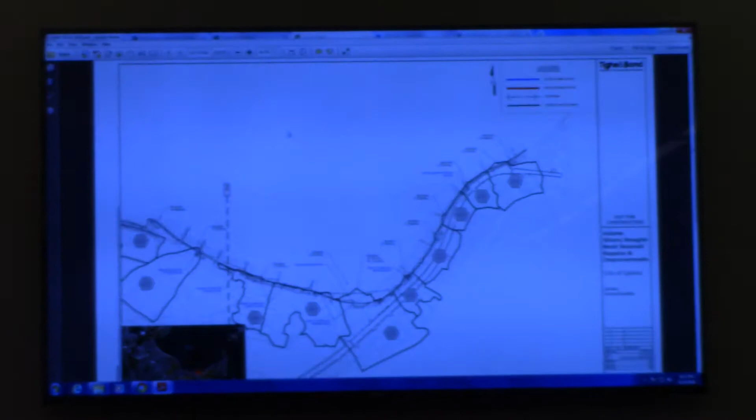So this is a map right here, called the sub-watershed map. Each of those drainage areas, based on topography and runoff and so forth, flow into the tide gates and outfall pipes. That's why we're meeting with smaller groups, because there are very specific needs and issues associated with each small group.

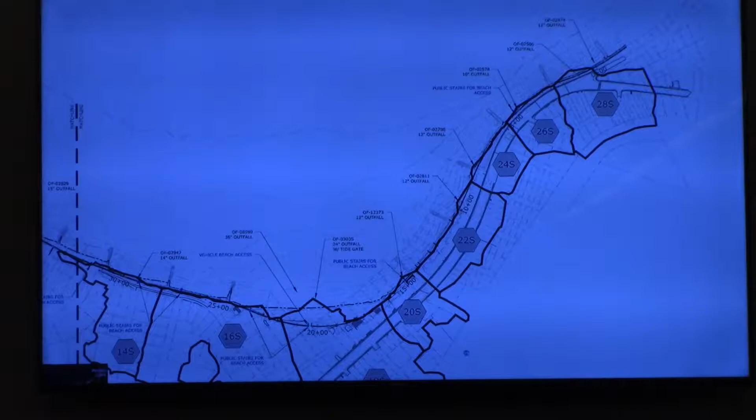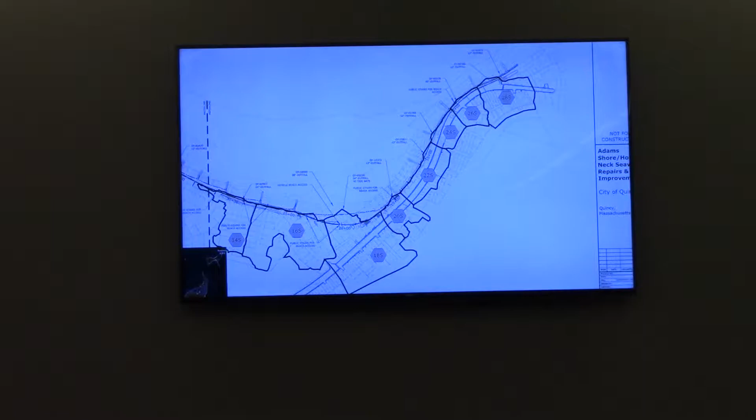That's why we've asked you all here tonight, and Dave has broken up this section of the seawall based on the different sub-watersheds. So this neighborhood, you guys all collectively know those outfall pipes and tide gates, probably 3 or 4 of them, I think there's 14 along that whole stretch. So we're meeting with small groups to talk about 4 or 5 outfall pipes, and Tighe & Bond will get into very specific information. They've done a lot of calculations.

So the goal, and Dave, Ken, correct me if I'm wrong, is to increase all the outfall pipes to handle a 100-year storm instead of a 10-year storm. They can increase the size of the pipes or increase the slopes of the pipes. That all gives the pipes a lot more capacity.

The outfall pipes, the ends have all been found. We clean them out on a regular basis. Sometimes the tide will come in and push sand back in there. So these guys are fully aware of all the existing conditions and how best to fix it.

So if we're going to upgrade those pipes to a 100-year storm event, we may as well do it before they build a wall on top of it. If you have a pipe that might be 12 inches in diameter, these guys want to make it 2-foot diameter, we have to do it before the wall goes in. So a lot of the drainage concerns you had at the last meeting have been addressed.

The second thing I took away from the meeting was access along the wall and through the wall. Dave and Ken have developed very detailed plans on the different access points and added some public access through the wall, and they revised the detail.

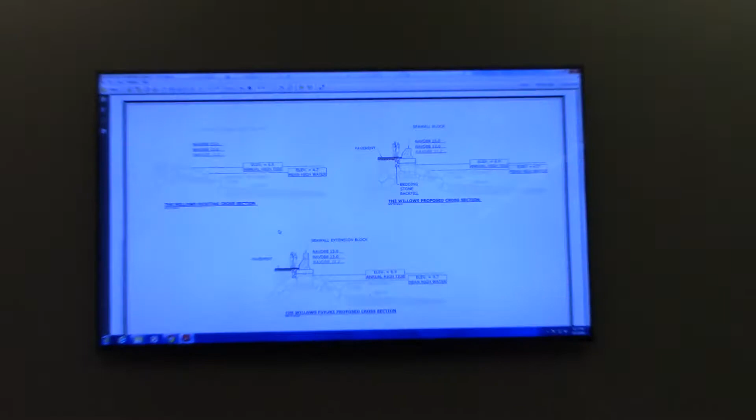So we looked at several different cross sections for the details, and these guys will get into the specifics. But that red that you see right there, it's largely going to be the shape of the seawall that's there now. We're just going to bring it up a couple feet, but it'll be that same mass.

So the access along the wall that we spoke about at the last meeting wasn't as high a priority as this detail. Again, from the last public meeting, we heard a lot about drainage and flooding, and a lot about access. We've tried to correct it in the revised design. So with that, I'll turn it right over to Dave.

Thank you. Just one thing, and I know Dave you're gonna cover this, but Paul put up that diagram too.

Today, as I said, we started early, 9:30 or so, 10 o'clock, and went pretty much the stretch all the way up to Mike Carter's house. But conversation was back and forth that the design going up 2 feet, and Dave Murphy will touch on it a little bit. We can also talk about making the design so that an additional 2 feet can be added if we have to go there.

So that's going to be a little back and forth conversation, because I know folks in some areas are saying, hey, we want to go higher. We realize that we're on Sea Street and the houses between the Willows and Shoreside, you go up 4 feet, it's awful high.

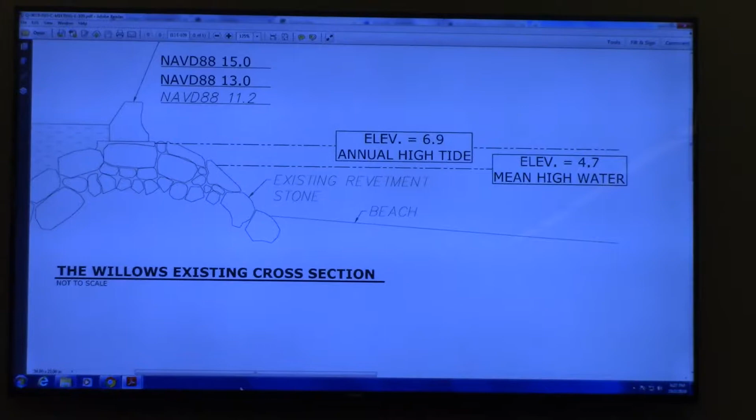Ken, if you can zoom in on the top left—this is the existing cross-section. We call it a curved face block. There are 2 of those in the city: one has kind of a gentle curve, another one over on, I think it's Squantum Street, that has a more defined curve to it. But there are 2 separate blocks that exist in the city. That's one of them. We'll decide on that in a few minutes, and I'll explain that. That's where you are today.

So just for clarity, elevation at the top of the wall is average 11.2. That's NAVD datum. Be careful not to get confused, because there's a 5.2 or 5.4, 5.5 foot difference in some of the datums, so always be careful which datum you're working off of. Tonight we're only going to use NAVD 88. So the top of the existing wall is 11.2. Mind you, the annual high tide is 6.9, and your mean high water is 4.7. So just understand that height difference between the top of the wall and your mean high tide here.

What we have talked about at the last meeting was going up to elevation 15, about a 4-foot increase.

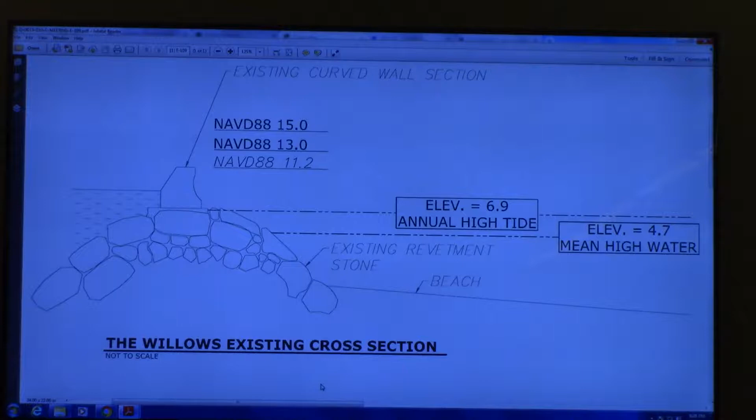After all the feedback back and forth, the city's come to the decision that right now we're going to move to a 2-foot increase with the ability to go to 4 foot. So right now the plan is to move to a 2-foot increase. And Ken, that's the 2-foot increase right now, taking the top of that block up to NAVD 13.

In the discussions we've had internally with the city, it's a compromise. It's the ability to—if we did a 4-foot increase up to elevation 15 today, that effectively is a 75-year design, maybe a 100-year design life, the life of the structure. But by going to 13, it's a decent design today. It covers today's wave action.

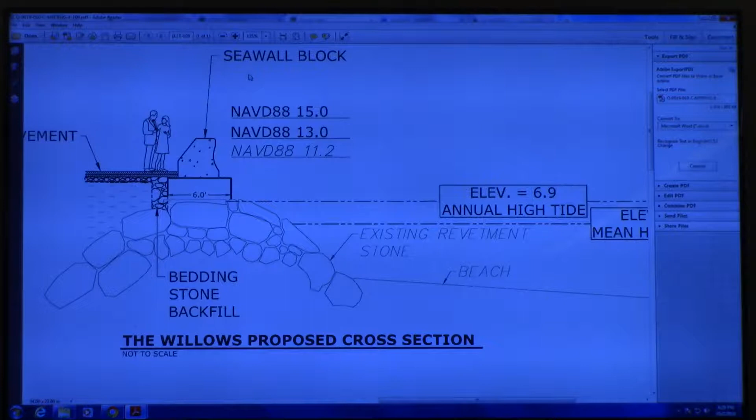But we know, as we've discussed, that sea level rise is upon us, and that we're going to see some of that. So having the third option—where we're headed, Ken, if you flip to that one—this gives us the ability to take a 2-foot block, and the way we're going to design the lower block, we're gonna design it so that we can put either an 18-inch, or 24-inch extension on the top of it, similar to what was done on Edgewater Drive back 15, 20 years ago. So that's kind of where we're headed right now, that block design with the ability to put the seawall extension block on top of it.

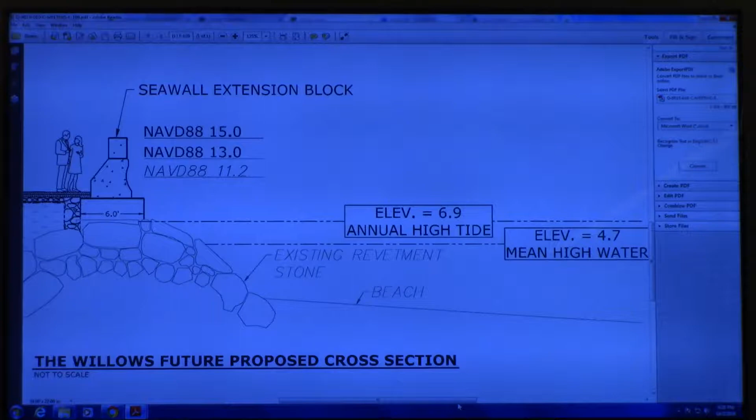That is a balance between the blocking of views and trying to address the long-term rise in sea level and ability. So we believe that the 2-foot rise will eliminate the majority of the wave overtopping for a storm like we saw in March. There'll still be water that'll get over, but it'll be more the splash as opposed to a heavy volume of water that'll come over.

This is a reminder, the storm we had in March got up to elevation 9.5. So Tighe & Bond is proposing coming up to 13, which is still 3.5 feet above that high tide we saw in March. So we're dealing with wave action at that point. If the wall was at elevation 13 this past March, a lot of the flooding would have been taken care of.

And I think too, as we strolled around today on the wall, and we realized this a couple of weeks ago when we all had a meeting up at City Hall, how close the houses are to that seawall on Sea Street, till you get to Post Island, you get a little loop there. But also, as we walked along, we talked about the other side, the marsh side where PJ is, to say even though we're gonna come up and protect this a little bit better on the seawall end with the proper drainage—and Dave will talk about that also in the seawall—we also discussed the other side, because that side, if it gets over, as a lot of people know, it's a very low point at the boardwalk, and to get it out of there we have to have good drainage too. So it wasn't just—I just want to reiterate to anybody, I know I'll probably hear it, what about the other side, what about the other side?

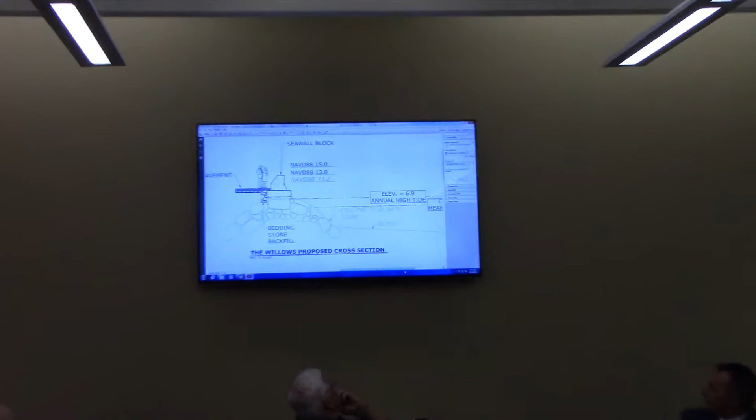So we'll be pouring about a 2 foot high pad. Right now you have a 4-inch leveling pad. That'll all come out. We'll go up to 2.5 feet, and then put the block on top of it. There will be about 18 inches to 2 feet wide on the top, but 2 feet higher. So you can walk on it, but it gets more dangerous because the fall is greater.

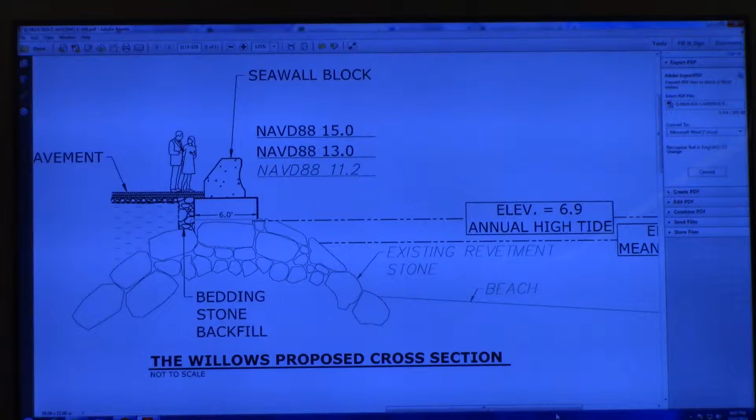You had a question? I did have a question. What number house again? 789. I noticed on the NAVD 88, you go from 11 to 15, and in the middle...

Was there any consideration for somewhere in the middle of that, splitting it not 2 and 2, but splitting it 2.5 and 1.5? We had a thousand discussions about that.

So you're settled on the 13? That was kind of the majority. The 13 was, we don't want to go below 13 because we need to address wave action today and some anticipation of increase in the near future. In speaking, in addressing this gentleman's comment, maybe it's 13, maybe 14, and then something added on top of that later.

And the second part of the question, I'm not looking for an immediate response by the way, is there any guarantee that the money will be available to put that 2-foot block on top?

I mean, that's all nice to talk about, but... Well, do you want to speak to the availability of money right now? We're talking about the 2 foot on the other side, he's talking about the future. Yeah, the future. I mean, I don't think that's a guarantee. I think they'll, you know... Oh, you mean the 2 feet to make it 15?

You bet. I mean, I can see in 15 years, you start talking about it, and the populace of the city saying, come on, how many times are we going to do this wall? Dave, percentage-wise, what would adding that cost? It's certainly not going to be the same as going up now, because the majority of the money is in the leveling pad and resetting the revetments, the pipes. So you don't have to answer it now, I'm just throwing it out there. It's not a high percentage of the cost we have now to add 2 feet.

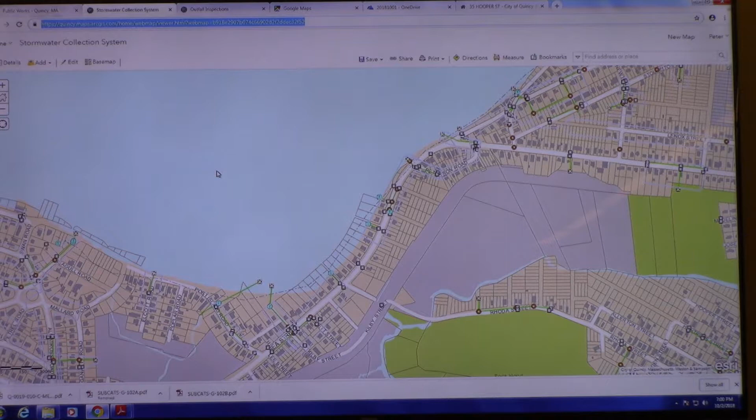There's roughly 14 outfalls along this stretch, along the project area. In this area, you'll note there's 1, 2, 3, 4, 5, 6, maybe 7 outfalls that collect drainage from a number of structures across the road as well. Councilman McCarthy was mentioning there's some drainage back here, but you'll notice there's a lot of catch basins—those little black squares—that drain and collect water toward those outfalls.

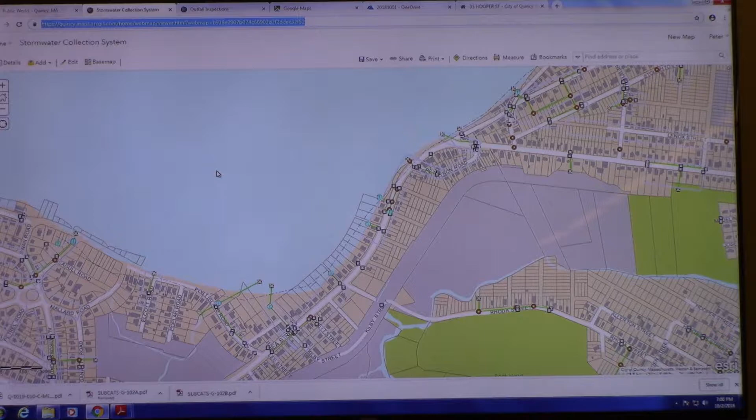What we're looking at, what Paul was alluding to, was using part of the city's GIS system that allows us to look at the drainage areas for each of these outfalls. So we've broken this down and said, okay, this outfall pipe here is collecting an area of so many acres, and today that pipe is 12 inches in diameter. Well, that 12-inch pipe, pitched a certain way, can allow a certain amount of water to flow through. So we're looking at what the capacity of that pipe is.

After looking at all the pipes in the system, we wanted to recommend increasing those pipes to a minimum of 16 inches. We found some catch basins discharging using just a 6-inch pipe. Going to a minimum 16-inch pipe increases the capacity to move stormwater from one side of the wall to the other significantly.

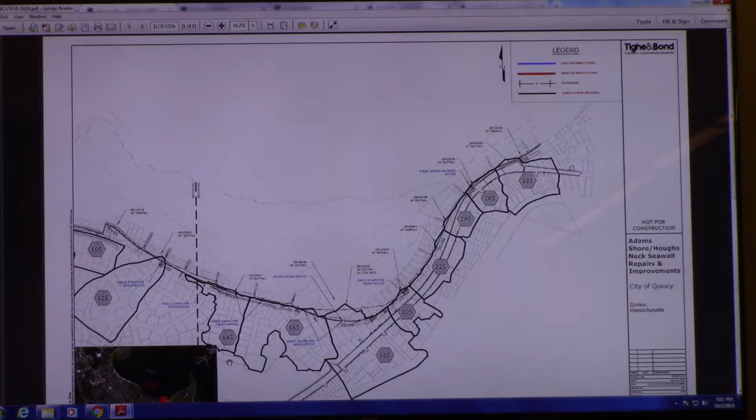That alone is not going to solve every problem, because it's a comprehensive plan that we're working with the city to implement. It's making sure the catch basins are cleaned out, making sure outfall pipes aren't buried with sediment, making sure they're located and cataloged in the GIS system like this. So the city's got plans in place to do this work, and you can see from the data they've collected through GIS that they have methods to implement the changes we're recommending.

So with that said, we're looking at increasing capacities through the system fairly significantly. In some instances, going from a 6-inch pipe to a 16-inch pipe is going to make drainage better, but it's one small piece of the puzzle.

The larger piece is looking at the areas behind as a whole, doing further investigation to figure out, on Post Island Road, on Shoreside Drive, where there are low spots, where we can locate either a temporary pump during severe storms, or a pump station—literally a building that fits in with the neighborhood—and in critical times of storm surge, that pump can be turned on and start forcing water outside the outfalls. You do that, and you're now forcing water, regardless of where the tide is, and that water will start flowing the opposite direction.

Catch basins—locating the proper number of catch basins—the standard we typically deal with is generally a catch basin every quarter acre or so. In some of these areas, we probably see that there needs to be a few more catch basins put in. By putting those catch basins in, it channels water to those outfall pipes, thus removing stormwater from the other side of the wall.

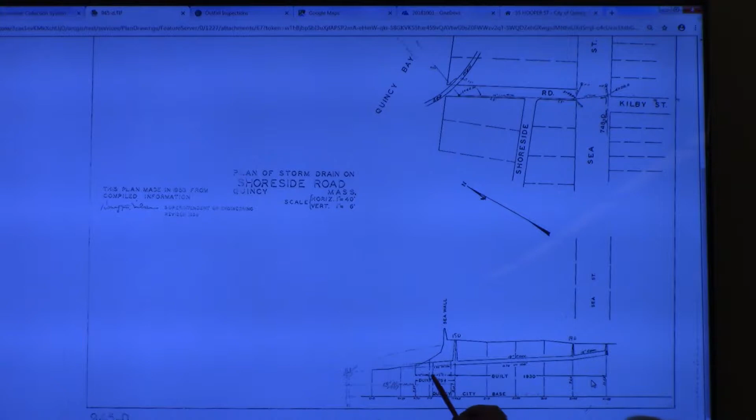Hey Ken, is this accessible for the public? These plans are over at the engineering department. This pipe here was built in 1930. Here's the seawall, here's a catch basin or manhole, same here. The pipe comes out at a certain slope and diameter, which dictates the amount of flow that can leave. So at low tide, the water will just flow out to the ocean.

The tide starts to come in. Then the pressure at this catch basin—the water acts like a straw, it will tend to do that. But if during the storm it comes up here, the water switches from here to there. Oh, it won't go anywhere. Bob, can you explain?

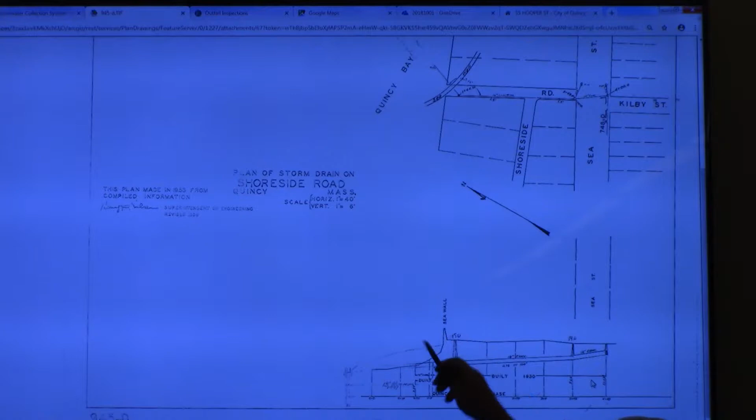So there's the hydraulics behind it all. This report here explains each one of these outfall pipes.

Just for clarity, if you have a high tide, the normal high tide is at 6 or 7. The drainage structures are up around 9, 10, 11. If there's 2 feet of head difference, if the water up gradient is above the tide, it will still flow even though the pipe is fully in water. The head pressure difference will allow that water to keep flowing, it just gets reduced some. So we're working on trying to figure out what the reduction in that flow is under different tide cycle conditions. So that's the problem.

Sorry, just for clarity, you had your hand up for a while. I was curious, are the drainage structures flowing into the marsh at all? Do any of them outfall into the marsh itself, or do they all flow towards the ocean? What about the marsh behind Post Island here? You do have a couple. Has there been any discussion about rerouting them from flooding the marsh, from basically surcharging the marsh, and directing those pipes into the bay itself so that the other water that's needing to find a place can rest in that marsh?

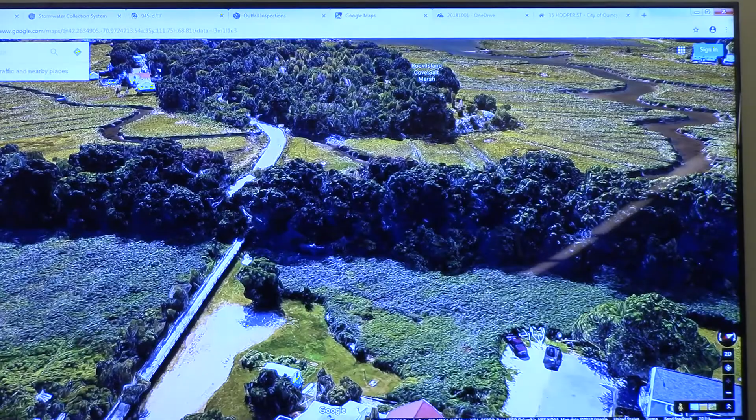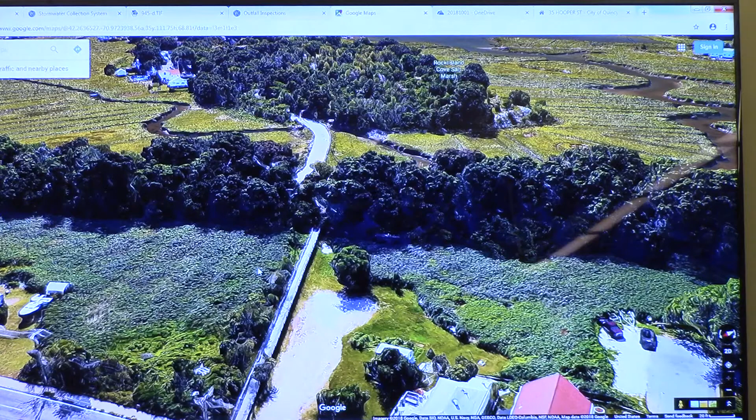And I think this go-around with the Army Corps and the folks I just mentioned, we have to come up with a solution. We can't just spin our wheels and have everyone go away, so it's a priority.

As we go through with the wall, there will be disruption along everybody's property. We'll try to minimize that disruption, but there will be sections with patios, some absolutely drop dead gorgeous. Right now the plan, as discussed by the city, is to replace in kind, so the contractor will be required to restore whatever is disrupted back to what's there today.

We got a Reader's Digest look as we walked along, and on some we're saying, okay, this has got to go back further. There were places where it's fine, so we'll go through it house by house so people will know.

Can you put up the GIS with the property lines on? There are several places where, as we raise the wall, the city has agreed to and wants to increase the number of public access stairs. So where there is an easement and access way but no public stairs, we will be adding a public stair there.

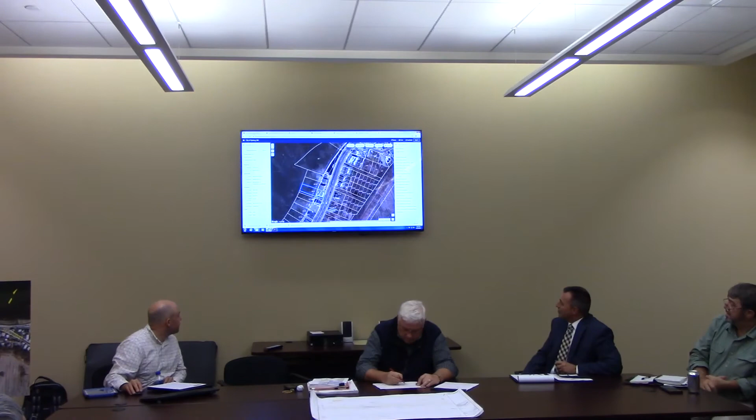There is a public stair, shown on that board on that side. Existing public access points are in green. In blue, we have proposed public stairs, so there are 2 additional public stairs that would be added as part of this.

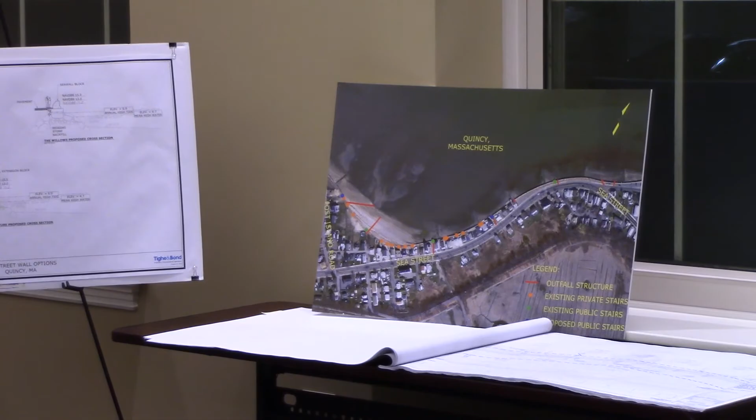And then I believe the other one is right here. So we've got one there, and then there would be another one on this side right here.

I think that's a much better approach right now. I know there'll be other questions, and we'll probably have other meetings.

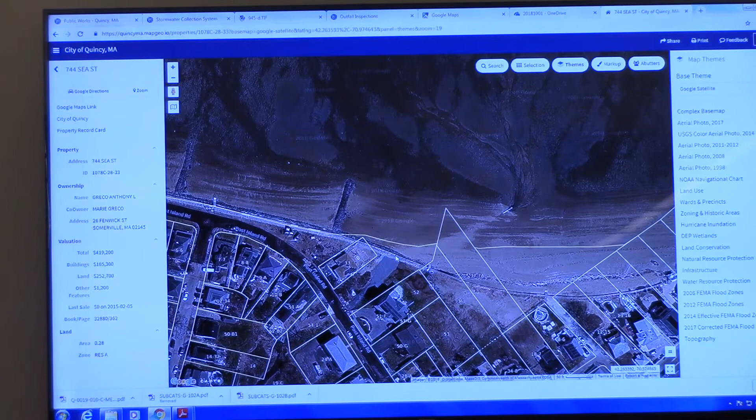Like I said, October 9th is Post Island, and we're actually going to let Tom Kelly come again for South Road. They didn't ask too many tough questions, but that's all the way up through October 9th.

Then we have one a little bit later for Norton Road and Chickatawbut Run. That doesn't mean we won't circle the wagons again if we suddenly come to grips with something that's a knuckleball and have to come back.

But I've got to tip my hat, first of all, to the involvement of the neighbors, which has been great. I know in conversations with Paul especially, Mike Carter's comments, Charlie Cote, the whole Post Island and Sea Street folks that were at the other meeting.

I know it gets a little higher when we get up to Chickatawbut, I'm sure they'll be there in force, but we knew we'd get solid information from an experienced group on Sea Street and Post Island Road. Tip my hat to these guys, all the way since January, March and whatever, for helping me answer the mail pretty damn good. So I think we'll get there, keep working, take all suggestions, and make it all work in the end.

Yesterday I had a conversation with the mayor about this, and Chris Walker, really brief, just about what we came back with after our meeting a couple weeks ago, about the style, the railings going away, the width, the height. He's all in, he thought the meeting we had was great.